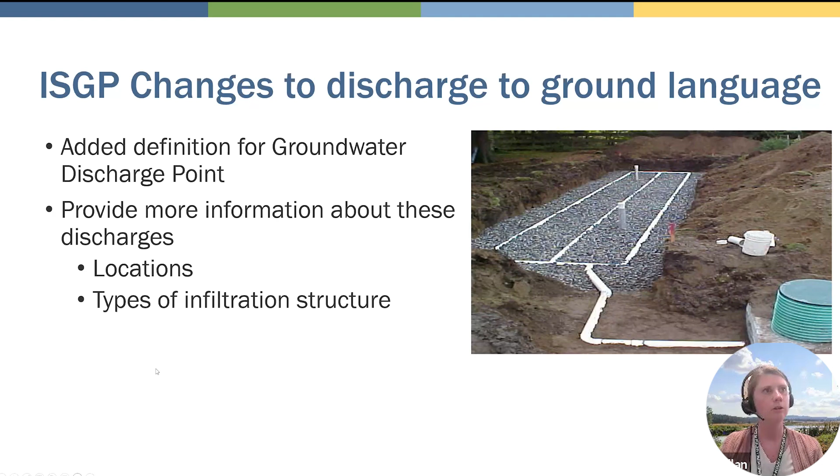So this is the language for the permit, condition S1.E, discharges to ground. The permittee is not required to sample on-site discharges to ground unless they meet these 3 requirements. 1, the facility is subject to per- and polyfluoroalkyl substances, or PFAS, per condition S5.B in the permit. 2, is specifically required by Ecology on that case-by-case basis under special condition G12, such as a SCOP, a significant contributor of pollutant determination,

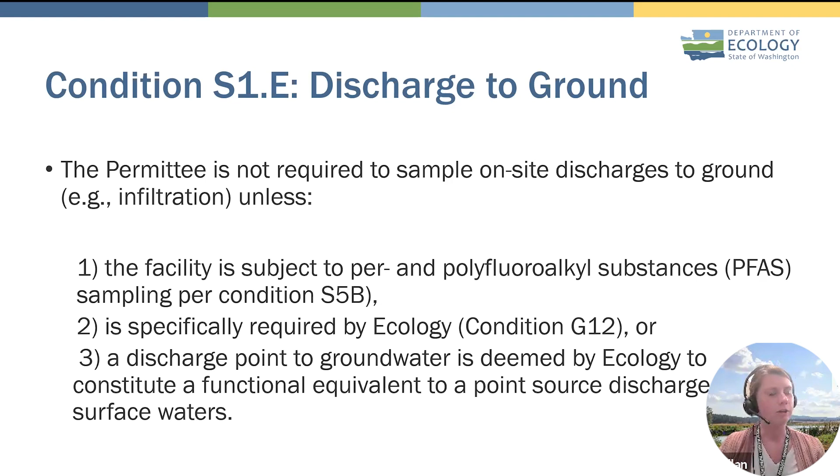or 3, a discharge point to groundwater is deemed by Ecology to constitute a functional equivalent to a point source discharge to surface waters. So an example would be, say, an auto recycler discharges all to ground, but that discharge to ground directly discharges to a water body or surface water like a point source discharge. What they think is a groundwater discharge is actually a surface water discharge. And we'll get more into how that is exactly considered.

So what triggers this, of course, is the facility being subject to PFAS sampling. PFAS sampling is now required for waste management facilities such as landfills, recyclers, etc., and airports that have known or unknown historical or current use of AFFF, which is the aqueous film forming foam, which is firefighting foams. This is a protectant that the FAA, the Federal Aviation Administration, requires just for safety in case there's a fire of some sort. And of course, these AFFFs, the aqueous film forming foams, have PFAS in them.

And so those activities run off and get in contact with stormwater and they're discharged to ground. There's a lot of groundwater contamination from federal facilities or military bases that use those practice type things, and they have a pond that captured all of it and it just all went into the ground back in the day. So Ecology determined that the two sectors, waste management and airports, have the potential for PFAS exposure and stormwater contamination.

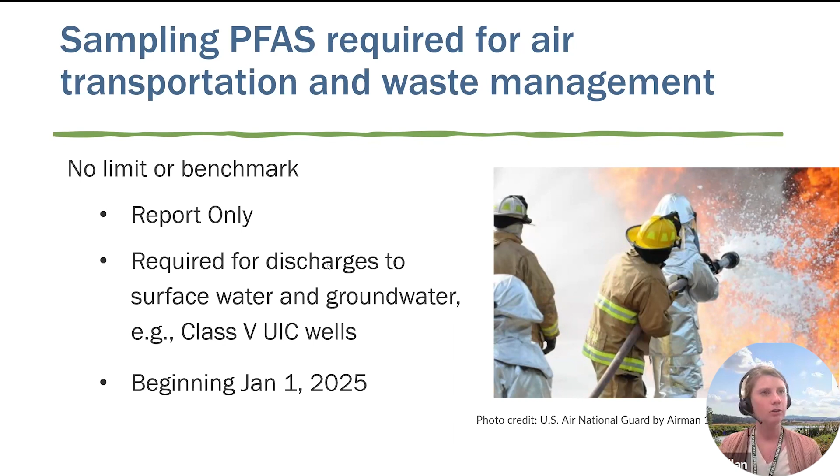So these are based off the Groundwater Protection WAC 173-200. In the WAC, water quality standards for groundwaters of the state of Washington fall under this code. And in that code, it specifically states that all groundwater in Washington state is classified as a potential source of drinking water. This is also in section 1.1 of the implementation guidance for the groundwater quality standards publication.

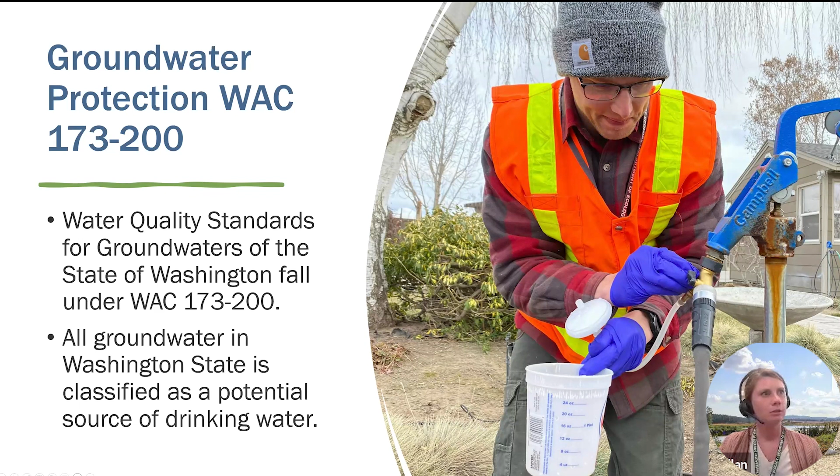Okay, so getting into the fun stuff of functional equivalent: what is a functional equivalent discharge? It's a functional equivalent to a point source discharge to surface water. If a site has a functional equivalent to a point source discharge to surface water, they need ISGP coverage. This is based off of the Supreme Court ruling in the County of Maui versus Hawaii Wildlife Fund court decision. With a functional equivalent discharge to surface water, sampling of assigned benchmarks is required, and a functional equivalent is an Ecology determination.

So I'll get into what the County of Maui versus Hawaii Wildlife Fund court decision is. I'm not going to get into all the nitty-gritty details, but the general summary is that it's a court case regarding a wastewater plant in Hawaii directly discharging its wastewater into ground via class 5 injection wells. The discharge resulted in being a point source discharge to surface water, the ocean, due to the lava tubes they were injecting into that they probably didn't know of, and the geology of the area that was transporting the wastewater directly into the ocean without dilution or natural attenuation.

So this has to do with time and distance of transport, as well as, like I said, it wasn't getting diluted. It wasn't being absorbed or filtered out through natural processes of sand, gravel, clays, etc. It was just a class 5 well directly injected into a lava tube, which then shot out with no dilution whatsoever into the ocean. So not very good for the wildlife in our oceans.

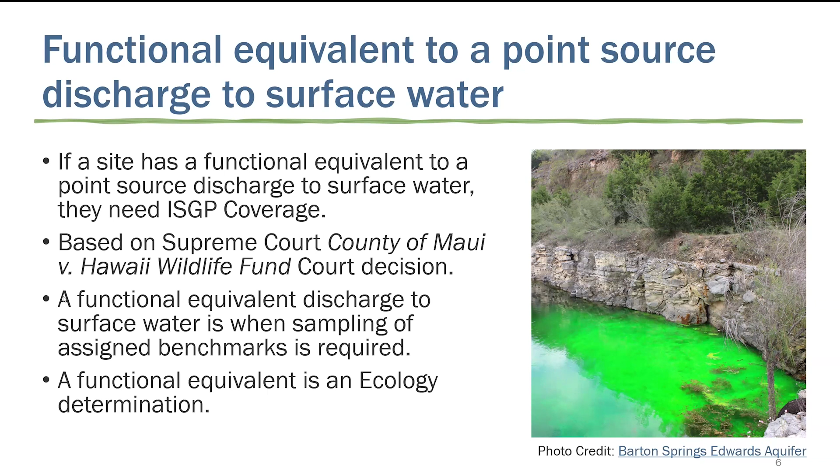Okay, so here's going to be another example. So another example is going to be a UIC well, or an underground injection control well, that is located 20 feet from the bank of a major river or water body, is a likely source of a functional equivalent to a point source discharge to surface water.

Okay, so we're going to get into some of these frequently asked questions that I found really useful on the EPA website. So the first question is, must the discharge be from a point source? And EPA responded, yes. A discharge of pollutants must be from a point source to waters of the United States to require NPDES permit authorization. In Maui, the Supreme Court held that NPDES authorization is, sorry, I need to move my screen here, is required for certain discharges of pollutants from point sources that travel through groundwater to surface waters and wetlands that are waters of the United States.

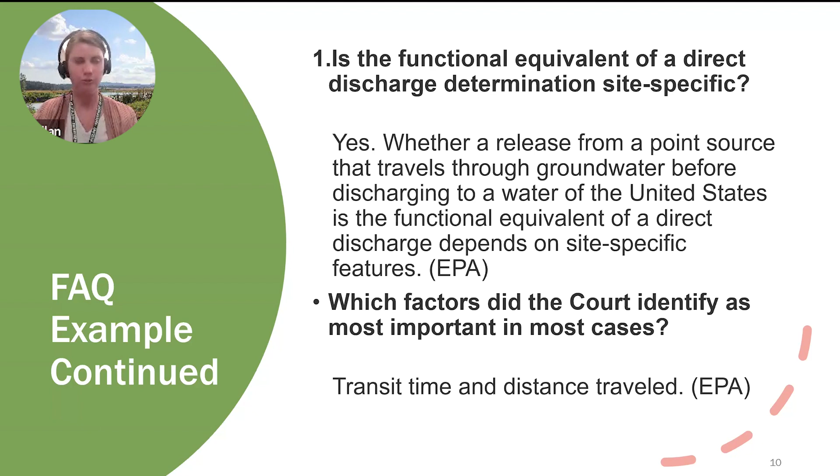Which factors did the court identify as most important? In most cases, transit time and distance traveled. Again, just thinking about that dye tracing test that's going through limestone or a lava tube, for instance, and is shooting directly into a surface water of the state. So hopefully this clarifies a little bit more of what the heck a functional equivalent discharge to surface water looks like.

Okay, sampling discharges to ground. I know we've been getting a lot of questions on this, and I'm still currently working on updating that stormwater sampling manual, but this is some language that is coming from that, that I work with John and a couple of our hydrogeologists here. So sampling discharges to ground. A UIC well or engineered system that is a functional equivalent discharge to surface water must be sampled for all of the assigned parameters. Again, functional equivalent, keyword.

If a permittee is required to sample for PFAS, they must sample any stormwater discharges to ground. The sampling may be conducted where industrial stormwater is discharged into the stormwater infiltration structure. So we've had questions. Can I sample after my infiltration BMPs? Yes, you can. And there are some ways that you can do that.

So for the last bullet, the sampling may be conducted where industrial stormwater is discharged into the stormwater infiltration structure. For example, you can sample in the catch basin that drains into a UIC well. You can sample after your infiltration BMPs to capture that treatment. And we will go further into that.

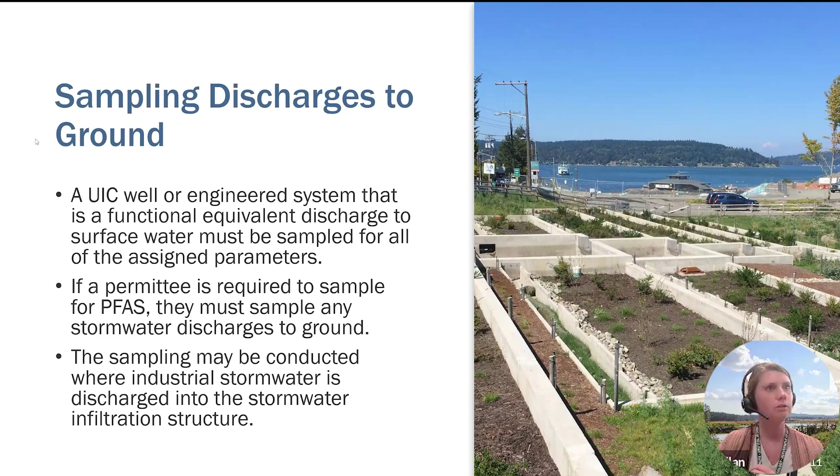Uh-oh, there we go. Okay, perfect.

So a permittee may sample stormwater runoff after infiltration treatment, like a bio infiltration or a bioswale. You can do that via a piezometer, like this shown here, or a lysimeter installed through or immediately down gradient of an infiltration BMP. So you can shove it straight down into the bioinfiltration BMP, get into that vadose zone that's unsaturated, and start collecting that water for PFAS.

Because PFAS doesn't really absorb or degrade. But if you have some biochar mixes, or maybe there's some carbon, it might absorb a little bit and filter that out. But for the most part, PFAS, as we know, is pretty indestructible.

So the screen of the piezometer or well can be installed in the vadose zone prior to the treated stormwater reaching the groundwater table. And samples may be collected using a peristaltic pump or other low flow sampling equipment.

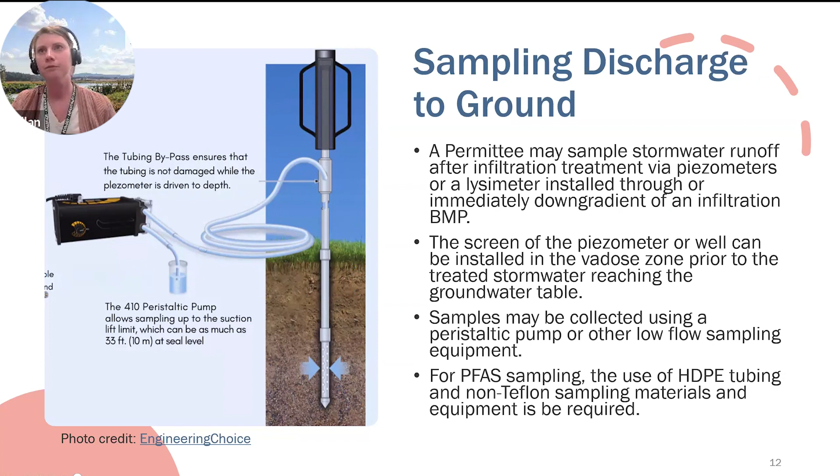Okay. And this is a little schematic that shows your peristaltic pump and your HDPE tubing and the pore water going into that screen length and all that fun stuff, which is a good picture. Okay.

Sampling discharge to ground continued. So a piezometer or lysimeter should be screened within the vadose zone and immediately below the BMP to be representative of the treated stormwater discharge before discharging to groundwater.

The piezometers, and that should not say shallow monitoring wells, that should say lysimeters, must meet minimum construction and installation requirements per WAC 173-160-451, which John will go into more detail. And this rule requires a surface seal with bentonite to prevent potential contamination from the surface migrating downward.

So if you think about it, say you have a site that has historical contamination. Maybe it was a Superfund site and it got capped. You want to bentonite that seal. You really want to seal that off so you're not shoving your contaminants deeper down to where you really don't want them to be going. Just as a precaution.

So an example for where you would put your piezometer: if a BMP such as a bioretention basin or a bioswale is 10 feet deep, the piezometer or lysimeter should be placed 11 to 12 feet deep to capture a representative sample.

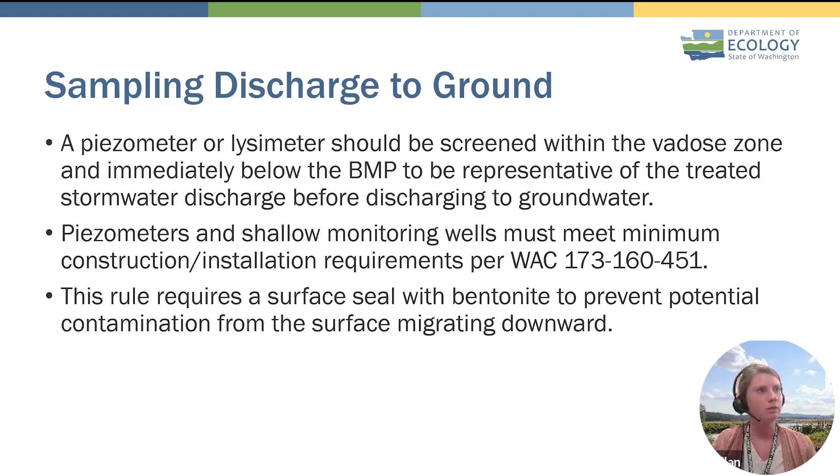Okay, and I will hand this off to John, and John will let me know when to advance slides. Oh, thank you, Shannon. So now this portion of the presentation is going to talk about UIC wells, rules, permit requirements, and examples. And Shannon, you can move on.

So the underground injection control program, that is the UIC rule, WAC 173-218. The UIC program guidelines for stormwater discharge to UIC wells have been incorporated in the stormwater management manuals for the state. For Western Washington, it's in volume I-4. And for Eastern Washington, it's in chapter 5 of the SWMM.

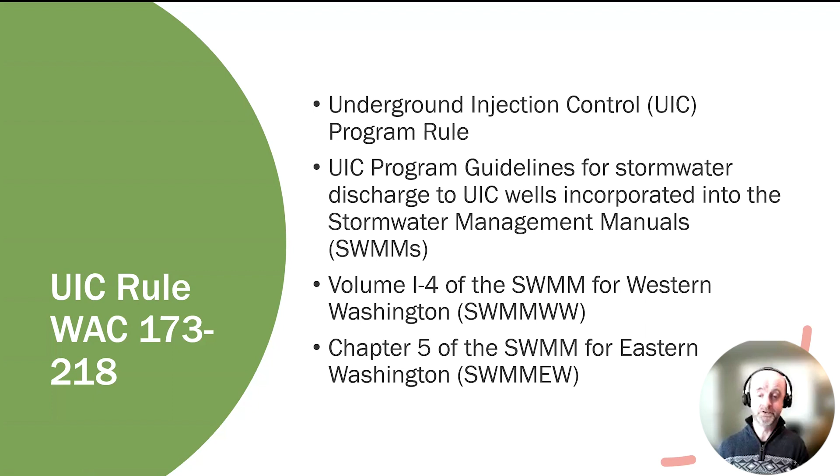And you might want to understand what is a UIC well. A UIC well can be one of the general different types. It can be a bored, drilled, or a driven shaft or a dug hole whose depth is greater than the largest surface dimension. And also it can be an excavated hole whose depth is greater than the largest surface dimension.

So to be either of those two, you've got to be pretty specific. It's not going to be like a stormwater pond or infiltration basin because of the depth being less than the greatest diameter. It also can be an improved sinkhole. And the first three are really kind of uncommon, not very readily used for stormwater management. The fourth type is a subsurface fluid distribution system, which includes perforated pipes, drain tiles, or other similar mechanisms intended to distribute fluids below the ground surface. These are more commonly used for stormwater infiltration across the state.

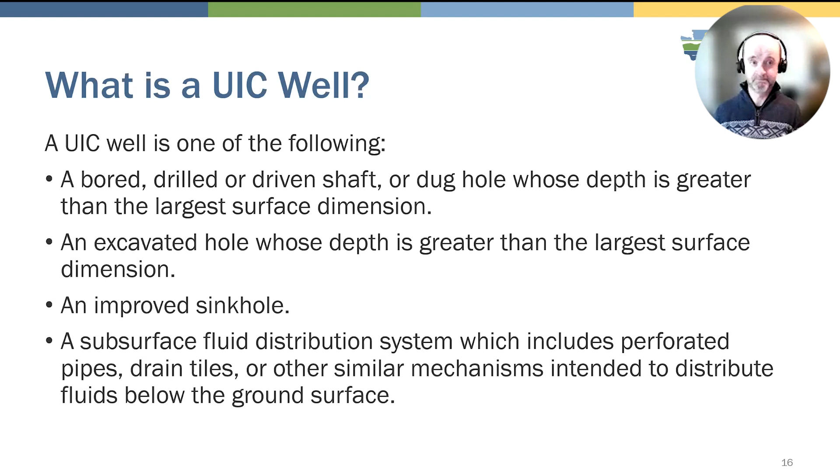And going into a little more detail, I want to talk about some examples of UIC wells that are used, that are termed Class 5 UIC wells. Class 5 wells are usually shallow injection wells that inject fluids above the uppermost groundwater aquifer. Some specific examples include dry wells, drain fields, infiltration trenches that have a perforated pipe, storm chamber systems with the intent to infiltrate. You see a lot of these appearing more often on larger acreage, larger size properties.

We've got large buildings and parking lots, and they can put them under the parking lot areas to maximize the buildable area. Then also French drains designed in part to discharge surface water into the ground, and also bioretention systems intending to infiltrate water from a perforated pipe below the treatment zone.

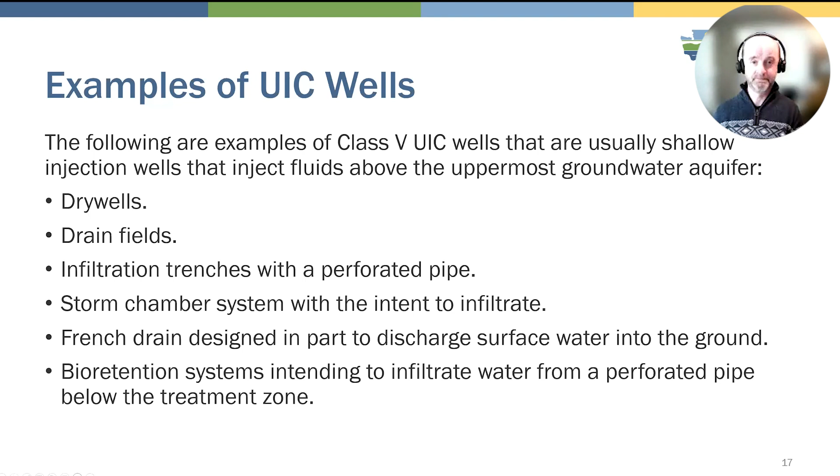And this slide shows some images of different types of Class 5 UIC wells. As I said before, they're man-made structures deeper than the largest surface dimension, or contain perforated pipe. That's a good general description. So over on the left, you've got a cross-section diagram of a dry well. Top center, you've got a typical dry well awaiting to be put into the ground. The upper right image is of an infiltration trench that includes perforated pipe. And down on the bottom right, you have an example of a storm chamber system.

Now, I want to also mention that of these Class 5 UIC wells used to manage stormwater, most of them are less than 20 feet deep. On occasion, you have some that are termed deep UIC wells, and those are the ones that penetrate the upper low permeable soils, glacial till, and discharge to deeper aquifers. Typically in Western Washington, it's the outwash deposit aquifers that are below the till.

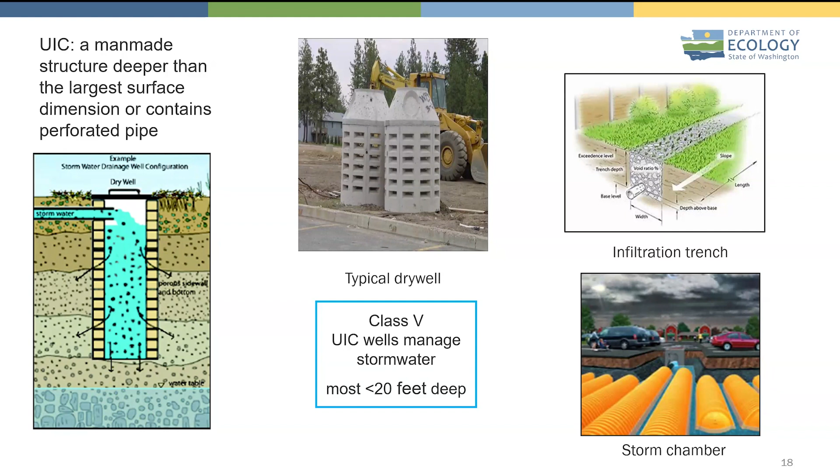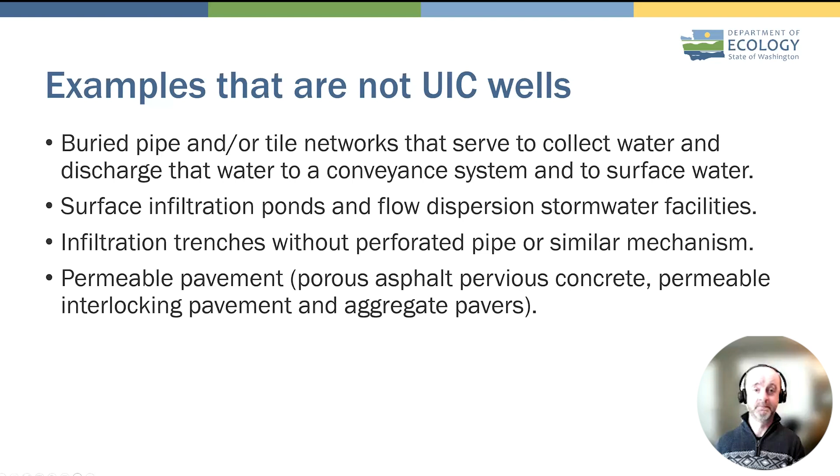And for UIC wells to be rule authorized, the fluids being discharged from the wells need to meet the non-endangerment standard. To meet the non-endangerment standard means that the fluids cannot contain contaminant levels that would cause an exceedance of the groundwater quality standards. And there's two different approaches one can take to design their wells to meet the non-endangerment standard. One is the presumptive approach. This requires implementation of the associated best management practices, BMPs, in the stormwater manuals or SWMMs, or an equivalent manual adopted at the time of construction.

The other way is the demonstrative approach. This must show with UIC specific emphasis how the proposed runoff treatment BMPs will be protective of groundwater quality and meet the non-endangerment standard. When proponents do the demonstrative approach, the criteria are specified in the stormwater manuals. Basically, we want you to look at a site-specific analysis of pollutant loading, including a risk assessment of down gradient and adjacent drinking water sources. We want proponents to look at site-specific analysis of the treatment zone capacity of the vadose zone, if that's going to be used for treatment.

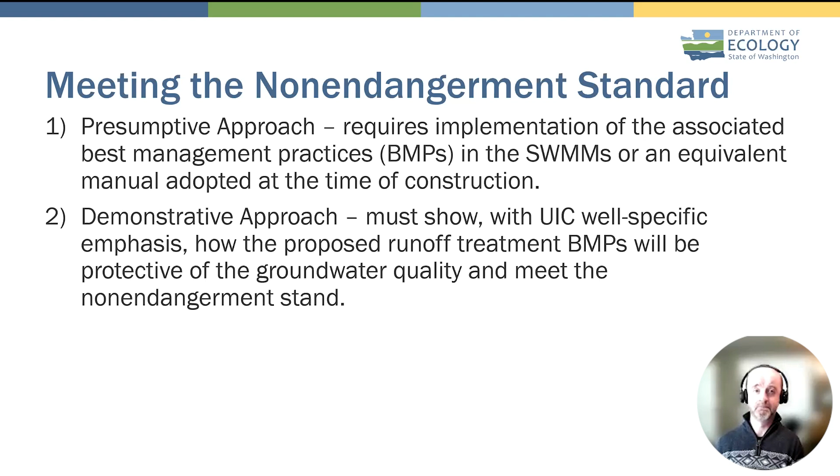And some of the UIC general well requirements: the UIC wells must either be rule authorized or covered by a state waste discharge permit or a waste discharge general permit. It also requires registration of the wells with Ecology's UIC program. The discharge from the UIC well must meet the non-endangerment standard. It can't cause exceedance of the groundwater quality criteria.

There's also some prohibitions on siting of UIC wells with respect to prohibited areas for rule authorization. These areas and restrictions and prohibitions are discussed in volume 1-4.12 of the SWMM for Western Washington and chapter 5.12 of the SWMM for Eastern Washington.

And some of these prohibitions, they might be on properties where vehicle maintenance, repair, and service activities are being completed, commercial or fleet vehicle washing, airport facilities, in general, industrial properties that might have outdoor storage of different types of products that could leach contaminants into the stormwater runoff.

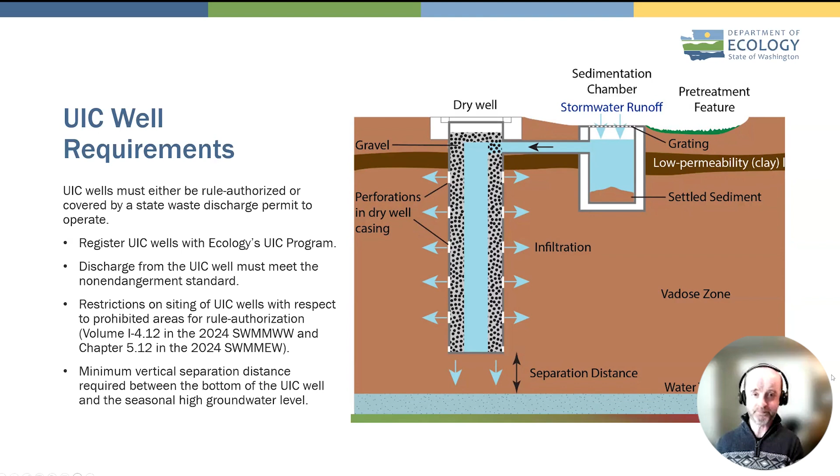We did turn the cameras off for the Q&A session, but we were able to write down the questions and we're going to present them to you anonymously. Some of the questions we didn't have time to get to, so we wrote down all the questions that were asked, sent them on to Ecology, and they have responded to us. So let's go ahead and get into it.

So the first question is: is Ecology putting out a guidance document on sampling methodology for PFAS for discharges to ground, for things like ensuring sample integrity, clothing of the sampler, etc.? Ecology responded that they for now recommend using the ITRC and Michigan DEQ PFAS sampling documents for PFAS sampling and sampling integrity, and that Ecology is updating and preparing to republish the ISGP sampling manual for where and how to sample for discharges to ground and PFAS.

The next question says, it sounds like foundation drains do not qualify as a UIC, but some French drains could depending on how they discharge. Ecology responded that foundation drains are not classified as UIC wells. A French drain that is designed in part to discharge surface water into the ground is classified as a UIC well.

The next question is, if a recycling facility has several different discharge locations that discharge to separate bioswales that frequently do not discharge to surface water, and one of those discharge locations / bioswales only handles packaged food waste for depackaging, could this discharge point be exempted from PFAS testing?